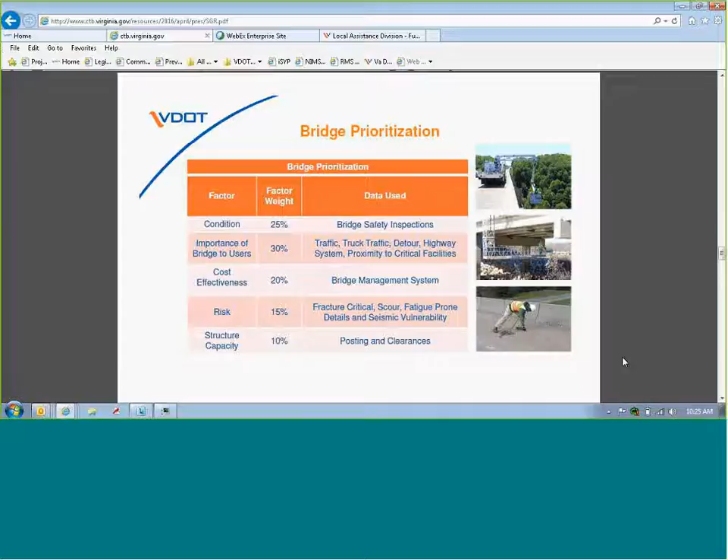That's really the basis of my thing. Let me then just go through very quickly the prioritization process for pavements. What we tried to do with the process on pavements, to keep it simple, is look from the perspective of the localities, moving the process forward because of the primary extensions process already in place. We moved forward using that same process, and the Commonwealth Transportation Board approved that process in July to be used in the future. So we were able to get projects started very quickly with the repair of primary extensions.

And when you're looking at pavement prioritization, we're looking at contiguous sections of pavement and not tenths of a mile segments. Because, as I hear from engineers, because I'm not an engineer and I will not play one, that's really pothole patching. So you're looking at true project type work. A section of our maintenance division has put together a list for some time that shows what work they completed on primary extensions to get the critical condition index of those projects up.

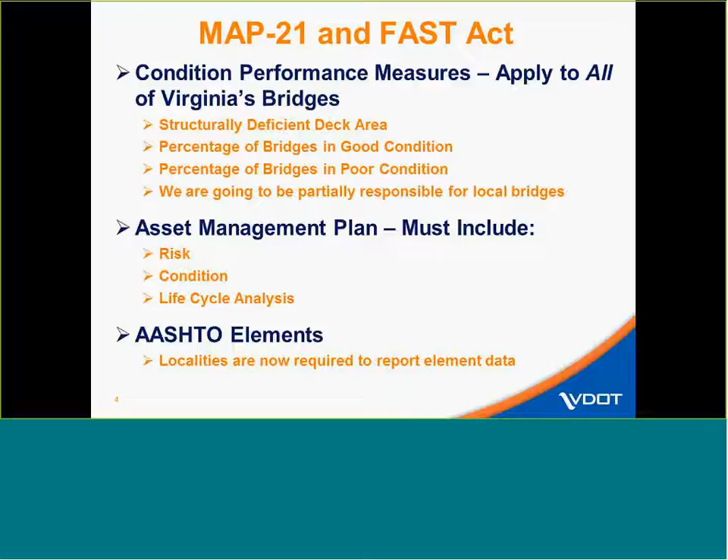Just a little description of some of the things going on in MAP-21 and the FAST Act. As I mentioned before, these apply to all Virginia bridges. In the future, the Federal Highway Administration is going to be measuring the deck area for bridges in good and in poor condition. And as I mentioned, we'll all be together as a state, responsible for local and state-owned bridges. Again, as Jennifer mentioned, they're requiring an asset management plan, and that has to include elements of risk, condition, and life cycle analysis.

What is the state of good repair? You've heard that term a lot. As it applies to bridges, as Jennifer mentioned, it is for deficient bridges and pavements, but what it is not is a maintenance program. I've heard the commissioner say this several times, because they were involved really heavily with the development of the law: this is not about getting a paint job on your bridge. This is significant work that must pass the test for taking a bridge off the structurally deficient list.

But at the same time, don't conflate this with a bridge replacement program. Many of the bridges that will be funded through the state of good repair will wind up being replacements. So don't come away from this thinking, oh, at this meeting they said we can't replace a bridge. No, that's not true. What we're trying to do is the most appropriate set of actions for every bridge. It's really critical, and we'll talk about that a little more as we go through it. And then, in accordance with the CTB resolution, the bridges are selected by the prioritization formula.

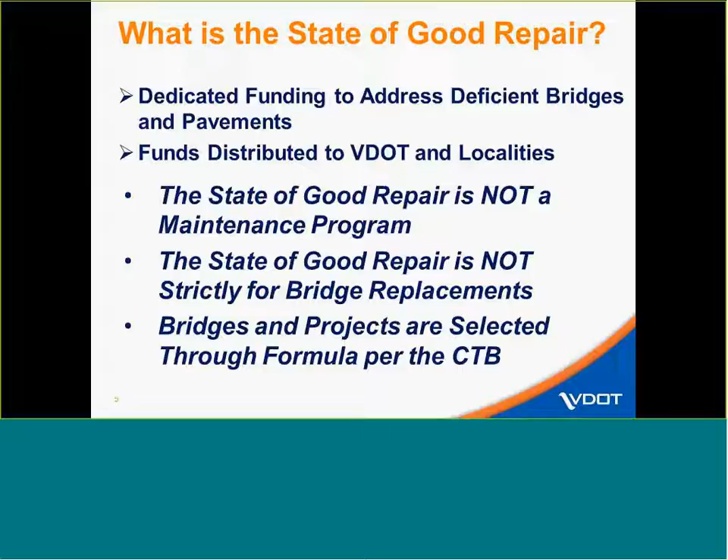What is the prioritization formula that we're using? We have the general prioritization formula, and we tried to make it really address the things that we would want to address as good stewards of these assets. When you have an inventory of bridges, you have decisions to make. The first one is, what bridge do I work on? You've got maybe a few as a locality, or thousands if you're a VDOT district. Of all those bridges, which ones do I work on?

And then the other question is, well, okay, now once I decide to work on that bridge, what do I do? I kind of get all of those pieces into a general formula, and this is showing the bones of it. It's based on these 5 variables. One for importance, one for condition, one for risk, what we were calling design redundancy, one for structure capacity, and that's vertical and horizontal clearances, and is the bridge posted? And finally, the last one is the cost effectiveness factor, which measures effectiveness of the proposed actions on that bridge.

So we put all those together into this general prioritization formula, and that's really the basis of the scoring. So just to give you a high-level introduction to what we're doing, and I'll talk a little more about each variable. I'm going to try not to kill people with technical details, but those first 4 variables are based on objective, nationally recognized measurements for condition and inventory. That's where you have some decisions to make. Each of the variables is based on a 0 to 1 scale and has really no dimensions or importance other than as a relative measurement. So it's kind of a scale of the bridges.

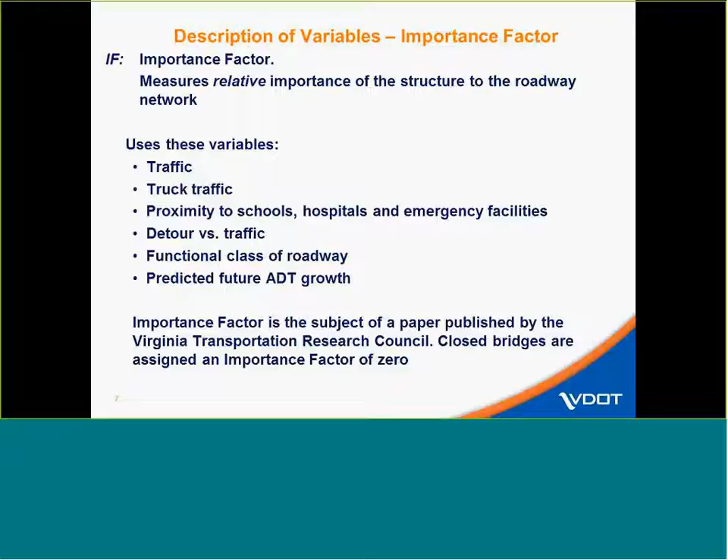The first is the importance factor, and this was the subject of a paper by the Virginia Transportation Research Council. It ranks all of the bridges in the state with the idea of saying, how important relatively is this highway that the bridge occupies to the greater highway network? In that formula, we use things like traffic, proximity to schools, hospitals, emergency facilities. We also measure detour versus traffic. So if a bridge has a very long detour but doesn't affect a lot of people, that's one thing. But if it affects a lot of people and has a large detour, that increases the score. And we look at the class of the roadway, and also how much traffic on that bridge is predicted to grow.

And you'll recall, this is in the law. This is a requirement, that we measure and consider condition. So that's the condition factor. For condition we take something called the health index, based on the element data I mentioned earlier. Many of you may be familiar with the general condition rating, a high-level description of a bridge and the big pieces on a bridge. But the elements are much more detailed. Think about a car: at a very high level, the engine, like the general condition rating descriptions, but for these elements we'd get down into the brakes, the tires, and all the little pieces of the bridge. We take that element condition state data and put it into a formula to measure an overall health index for a bridge, which gives us a sense of how much deterioration that bridge has experienced.

And this is new for many localities, so some of you have not had the opportunity to get data. Where we lack data, we have a correlation curve based on a weighted average of the general condition ratings that we're using for now and for this round, so that people don't go out and have an inspection that they don't necessarily need. So just so you know where that's going.

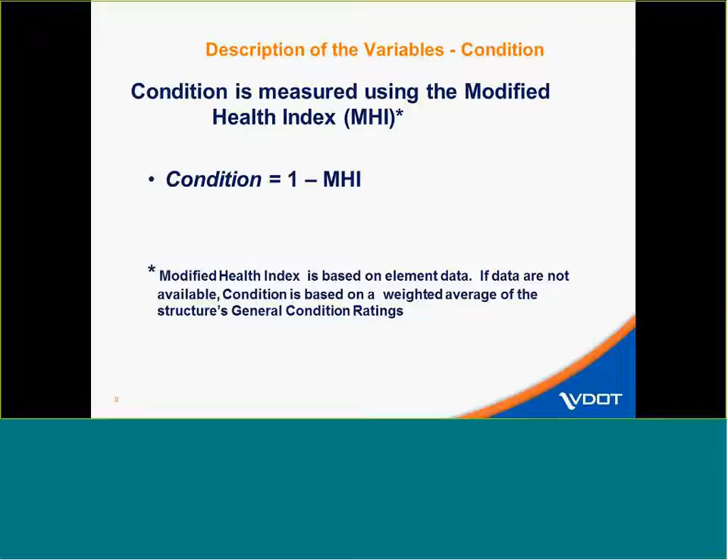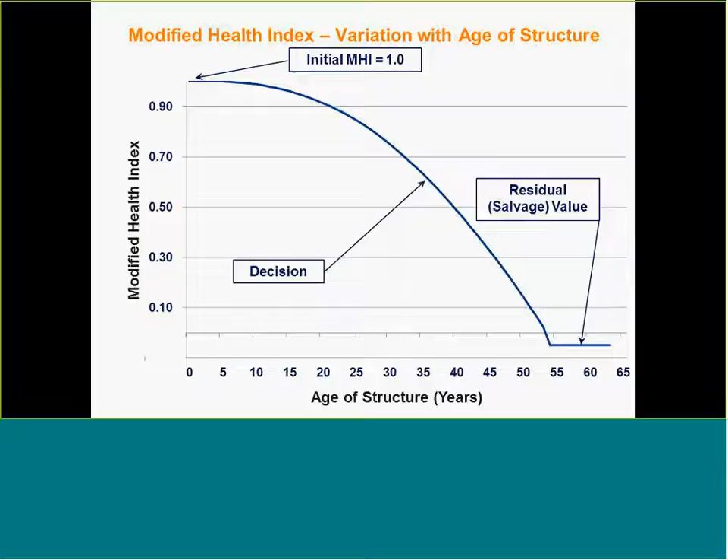Okay. This is again a high-level sense of what health index does. It gives you a sense of the deterioration of the bridge. It also allows you to understand the current valuation of the equity of a structure. Because a structure is a funny thing: it has value, and we're trying to make monetary decisions about it, but nobody wants to buy it, right? It doesn't really have any revenue associated with it. So this is a proxy for measuring current valuation of our structures. In this example, if you had a $1 million replacement for a bridge with a health index of 0.32, we could say that bridge is worth $320,000 of current value, or alternatively, that it's lost $680,000 of value due to deterioration. And the same thing graphically, as the bridge deteriorates over time.

Also, the redundancy factor, you can really understand this better by calling it risk, but that's kind of a loaded term, so we went with design redundancy, and it really has to do with when the bridge was designed and built, does it have enough redundancy in it to problems, right? So what we've done is we consider the factors of scour and fracture critical, and scour is the susceptibility of a bridge to wash out, which is a big problem for bridges, and when they do tend to fail, that's usually how they do fail.

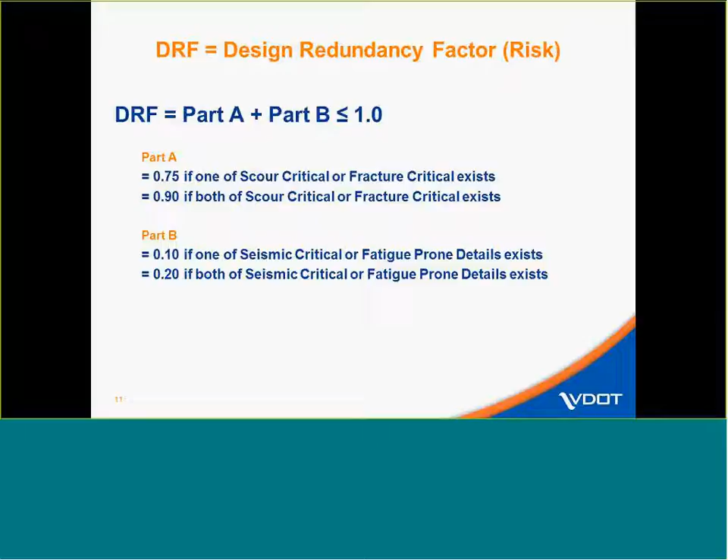The other one, fracture critical, and what that means is do we have a lot of additional beams? If it's just two beam girders that are supporting the bridge, then you don't have a lot of redundancy or alternate load paths. We try to measure that. And the other thing is called fatigue, for a bridge that has fatigue problems, and that's the susceptibility to repeated loads. We measure that. And also, is it susceptible to seismic activity? So we put it into the design redundancy factor.

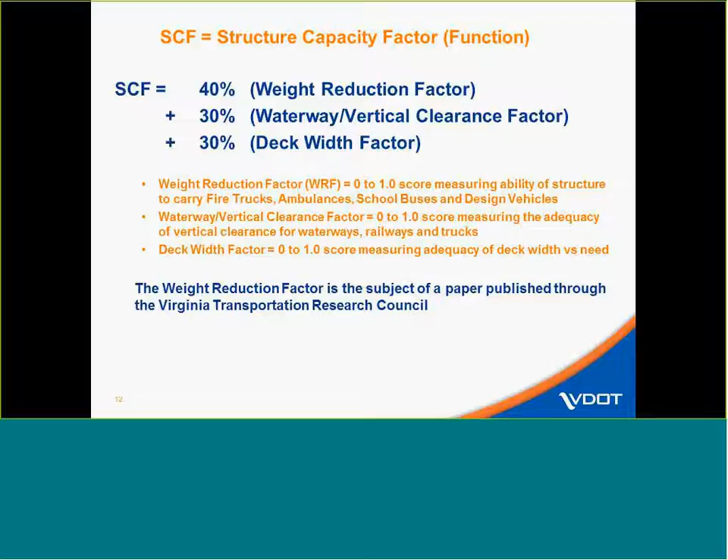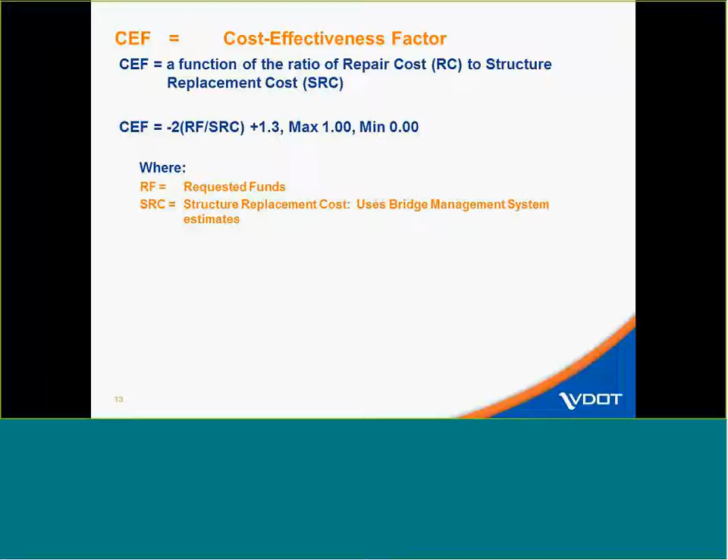Now, this is the last of the 5 variables. I'll probably be spending most of the rest of the time talking about this, because this is the most important for you, because this is the one that you can affect. The other 4 are really based on the data. The basis of this is really a ratio of the requested funds to the replacement cost, and there's the formula for it there. The RF is the requested funds, and the SRC is the structure replacement cost. Maximum is 1, minimum is 0. And the idea there is if we can do a more cost-effective repair, then we want to do more repairs, more work, rather than less.

Okay, pardon me. I apologize, I'm going to buzz ahead.

Now, the important thing is it's based on the requested funds. So I have an example. Say you had a bridge project that had a $10 million replacement cost, and you felt like the project cost needed to be $3 million. You had $1.5 million in funds from some other source, and you're requesting $1.5 million in funds from State of Good Repair. Then the ratio would be based on the amount you requested, not the project cost. So that's a really important part of this. In this case, you would be asking for $1.5 million, we divide it by the $10 million replacement value, and you get a full score for this value. And that's really important as you start looking at which bridges get selected.

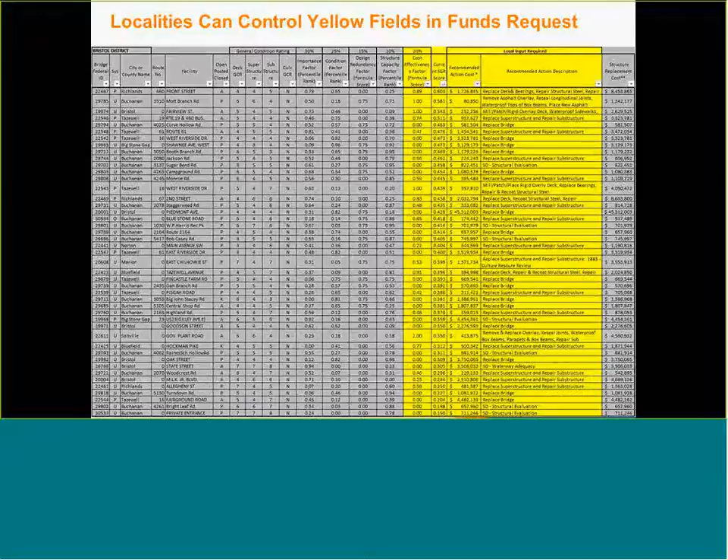The ones that you can control that do affect your score are these, the yellow ones, and this is the cost effectiveness factor based on the scope and estimate. Even though it's only 20%, it can have a significant effect on the rankings. So I want everybody to focus on that and understand it. And I'm going back through this.

At the due date, you'll submit a form that says this is how much money we're requesting, and this is our associated scope. And you'll get today, or whenever you get it, the suggested scope from the bridge management system. Now, the bridge system takes high-level, visually based information and makes recommendations based on that. You go into your individual bridge, and you'll know it a little better than the management system.

You may take chlorides, you may take strength tests, go in there and say, well, that's nice that the bridge management system says this, but we have a different view of what this bridge requires. Maybe it's less and maybe it's more. And that will inform your decision on what to ask for, how much, and help you develop your estimate.

The only thing is, if you're going to go over the estimate listed in the management system, then you need to get agreement from the VDOT district bridge engineer. You're going to change the scope. And it's basically a conversation where you say, hey, this is what we found, and this is why we want to go above. And that's an important thing.

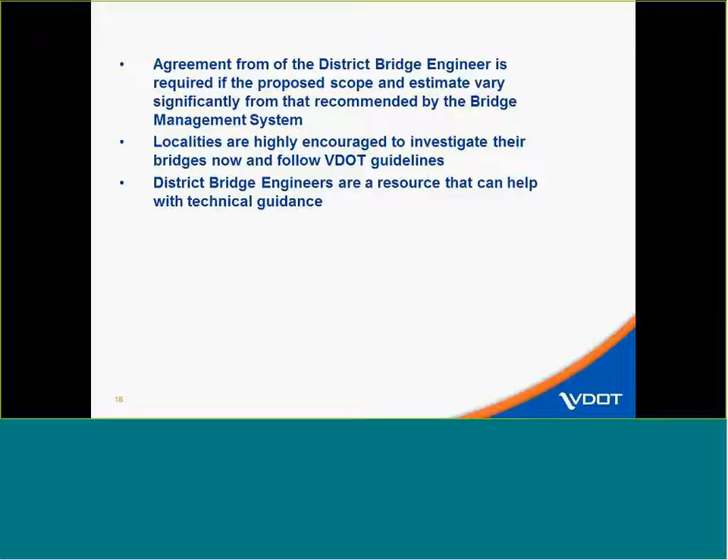We encourage you to investigate your bridges now. Go on out there, and we have a lot of guidelines on how to do that, and that guidance is all online. If anybody has any trouble finding it, you can contact district bridge engineers or us in central office, in the bridge division, and Todd Hallisey will share our contact information with you later on, or I'm available. So those are some important things to know as well.

Now, for anybody out there who came into this thinking, well, this is a bridge replacement program, I would at least introduce you to the concept of what we're talking about and why it isn't always going to be a replacement type discussion. And this is not just localities. This is Virginia, and the entire nation is starting to think in this new way.

Now, a quick study doing a 35-year look ahead: we have this aging inventory. What if we replaced every bridge as it turns age 70, or the bridges that are currently structurally deficient, replaced, not repaired and preserved? Now, you may have heard many people talk about a 50-year service life for bridges. In truth, when they were designing these 50 years ago, they didn't really know when it was going to need replaced. The 50 is probably a good standard, but we found that we can press them into service for another 20 years or so. But if we wait too long, then they do need to be replaced.

But this is the amount of money needed to replace them versus the amount of money that is available if we hit the high watermark for our funding every year for the next 35 years. These are billions of dollars of statewide need. So you can see that the money is not there for replacement. We can't put our head in the sand about it. We're aware of the problem now, looking forward, so we have to do the best thing now. We've got to start right away, and we're starting with the State of Good Repair Program.

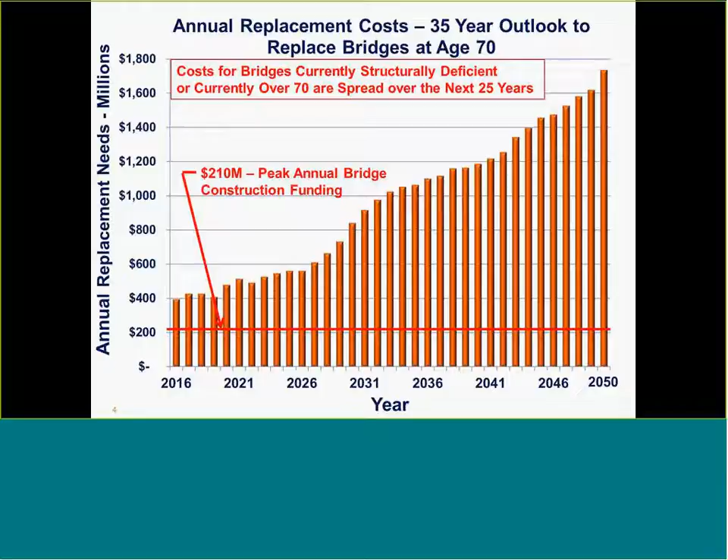No, it's saying in 2050 there are so many bridges becoming old that we're going to have to spend $1.6 billion to replace them all in that year. So our approach here in VDOT is we're shifting our culture. And it is hard to shift culture because we tend to think as engineers of designing and building a new thing. And honestly, I think politicians and many people just think that way. It's old, let's replace it, but we can't do that anymore, as the previous slide showed.

We've introduced this concept of targeted repairs in conjunction with system preservation. So, in more layman's terms, we go out and we fix what's wrong and recognize how it got wrong in the first place and try to prevent that from happening again. It's kind of basic logic.

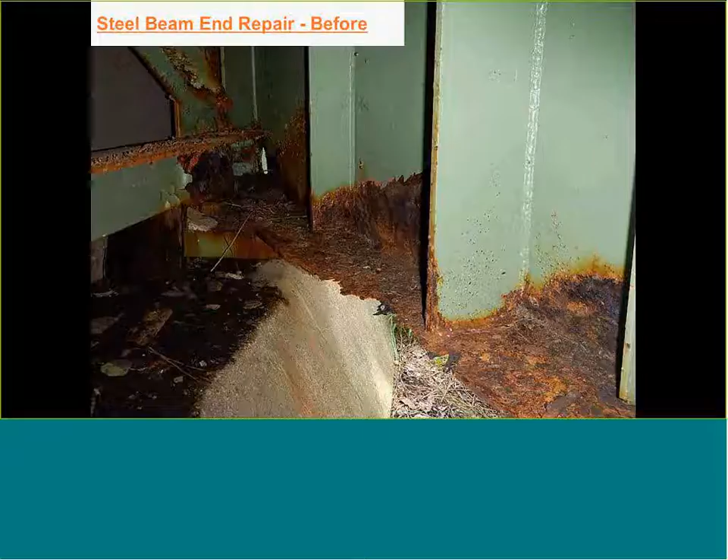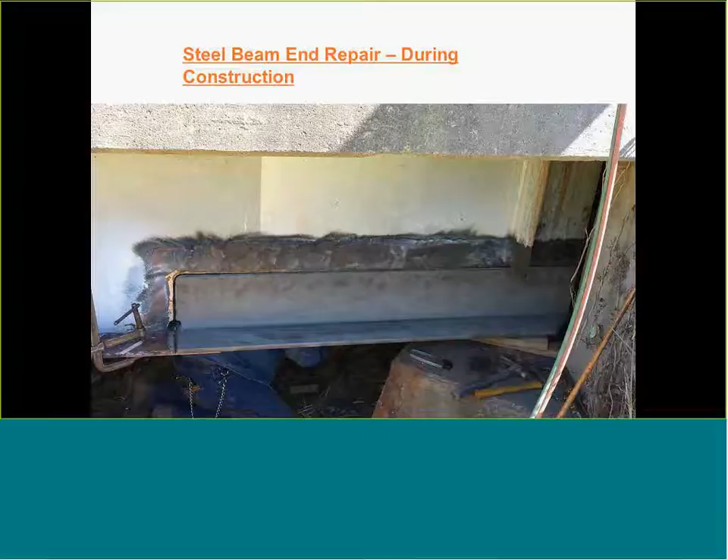The typical rotted beam in a bridge, you see, that doesn't feel good to look at. That's a corroded beam end of a structurally deficient bridge. Now, the old way, we would have talked ourselves probably into replacing that entire bridge because of this. But now, what we can say is let's just cut out the bad part, replace that portion of it, and we have something that's very functional now. Is it a new girder? Obviously, it's not. Will it give us decades more of life? Yes, it absolutely will. So this is the general approach that we're taking to fixing. Then you coat the beam and you protect it.

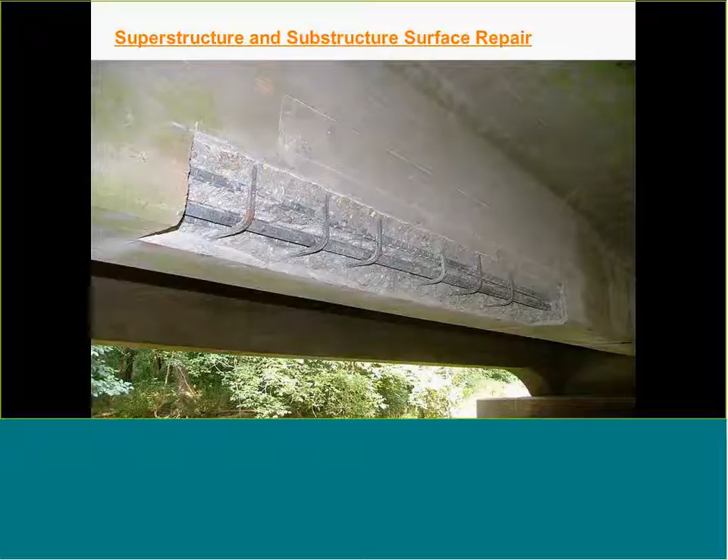We can do it for concrete too, and this is a portion of a concrete beam that was corroded and falling. We chop out, we pour back, and we repair the problem. And then you can do it for columns and pier caps. So all the corroded concrete that you see when you go into bridges, that can be fixed.

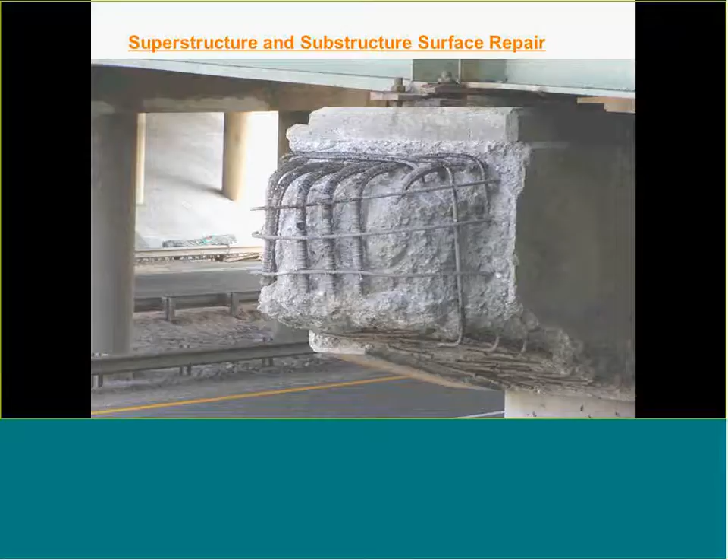Now, as I mentioned, it's not enough to just go in and fix the problem. We want to preserve. We don't want to have the same thing happen to us in another 20 years. The good news is we've developed good techniques for doing that, and we know what's causing the problem. And a lot of industries don't have that advantage, in the sense that we know exactly what's causing our problems. It's generally corrosion caused by water, and what's being carried in that water from de-icing chemicals, that sort of thing.

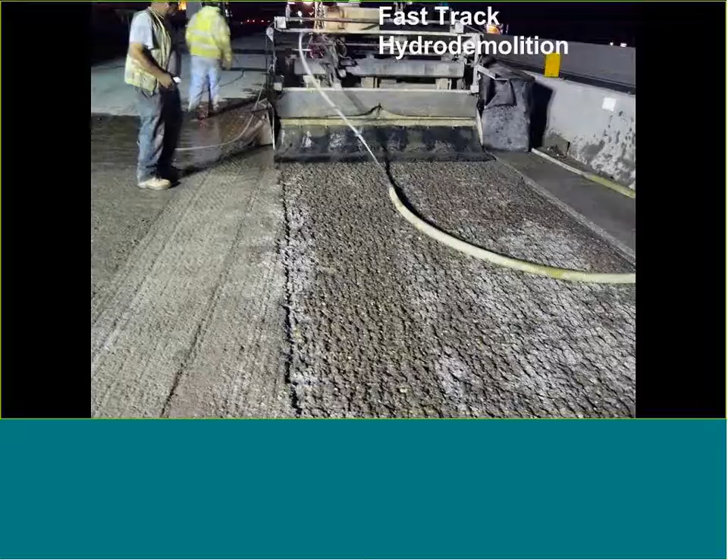One of the things we're doing, and we like to use the analogy of a roof. A bridge is kind of a house with a roof, represented by the deck. But we had this fatal flaw in our roofs that were built many years ago, which all had holes in them, and that's at the ends of the deck in the expansion joints. So we've got to get the roof fixed. So one of the things we're doing is a lot of overlays.

You go to a bridge and you take the chloride-contaminated part of the concrete out, the bad part, and we use something called fast-track hydrodemolition for a lot of that. That does two really nice things. That machine shown there is a fast-track hydrodemolition. It applies very high-pressure water to the surface of the bridge deck and takes that concrete out. And you can see a very rough surface for the concrete overlay to bond to, and that's a really good thing. Another picture of that on a bridge that we did here near Richmond.

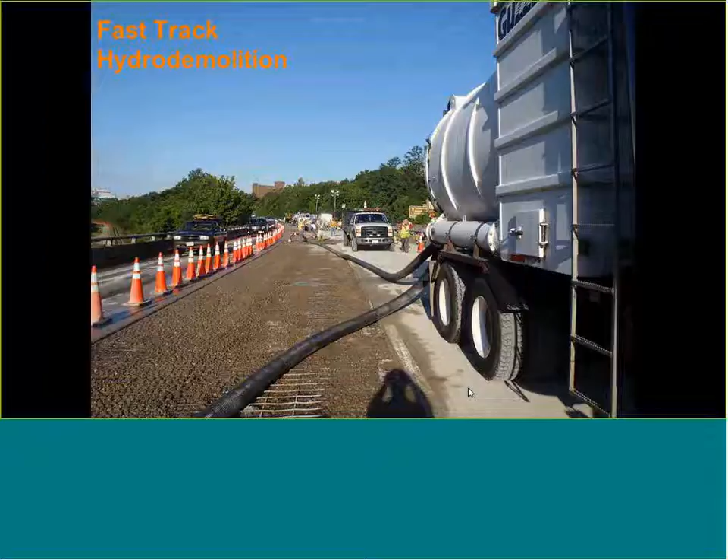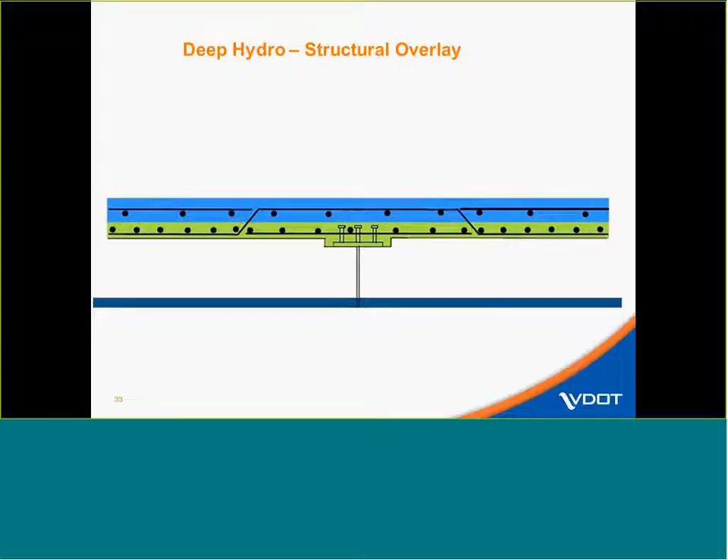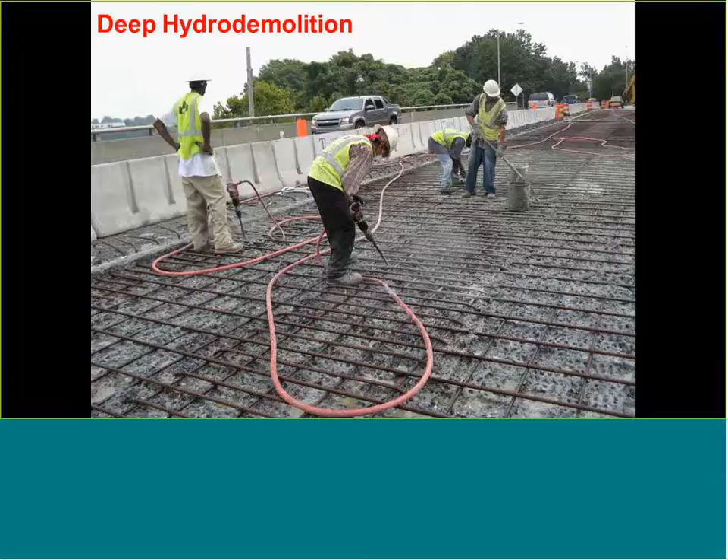They basically come out and prepare the deck for a new concrete surface. This picture shows that you can go very shallow with it, or you can go deeper depending on the degree of deterioration and contamination. And here's a picture of a deep hydrodemolition. You can see it goes deeper into the deck and takes more of the old concrete out, and hand chipping is involved with that. In the end, we put a new overlay on it, and it is essentially, for the motorist, a new deck.

And what's nice is the new overlay, the new concrete surface, is impermeable. The old problem with our older concrete is that it's really spongy. So when the water gets on it carrying the salt, the water goes into the concrete with the salt, and that salt causes corrosion. It's a real problem. But our new concrete sheds the water much better and really prohibits that effect.

And also the bridge deck expansion joints. When you're driving over a bridge, the clunk clunk, that sound, those are at the ends of the deck, and they're built in there to allow the bridge to expand and contract with the weather.

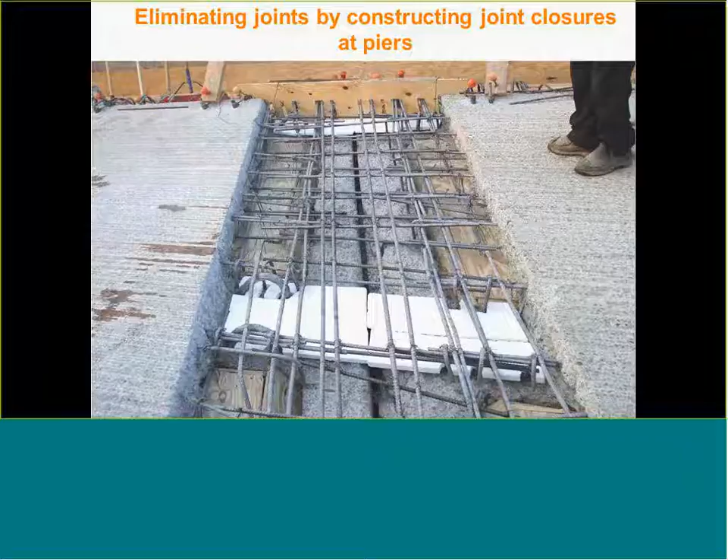But we found that we can eliminate many of those joints as long as we do a little analysis on the structure. What this is showing is there had been an expansion joint right there in the middle of this picture. And what we did is we chipped back on both sides of that joint, and we're going to cast concrete over the top of it. And that's what it looks like.

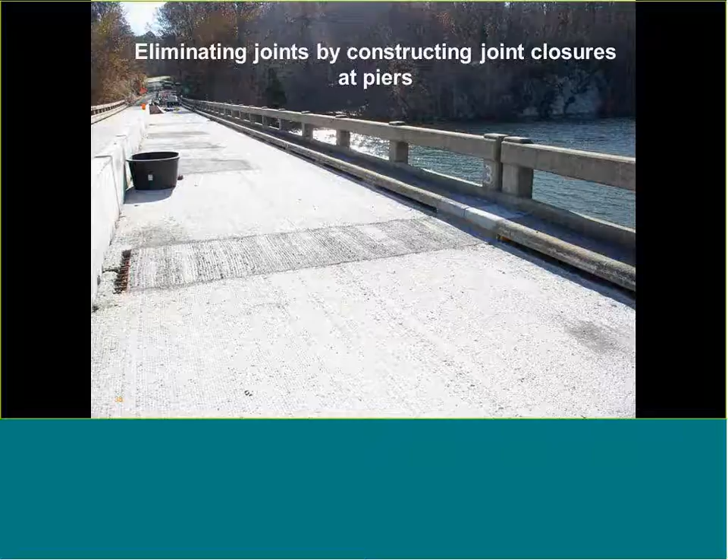So we had a joint at one time, that joint is gone, and then this bridge deck would then get an overlay so we have a smooth driving surface. Again, the idea is sealing up that roof, fixing the problem that allows the water and salt in. So quick examples, and I'll really just give a quick one here.

This is I-64 over the Shockoe Valley, just east of Richmond, near Central Office. And this is an at-grade and an aerial view of the bridge deck prior to the repairs. And it was a problem because you can see all the patchwork kind of look, all that patching that we had done out there, and the deck was deteriorating.

And we were thinking ourselves into a spiral on the thing. We kept saying, well, yes, it needs to be repaired, but you see, it's not really wide enough, is it? And gosh, it's part of this big interchange, and maybe for the interchange, we kept waiting, and the bridge got structurally deficient, and we kept saying, well, we can't do anything about it, but really we could. There was a lot we could do about it.

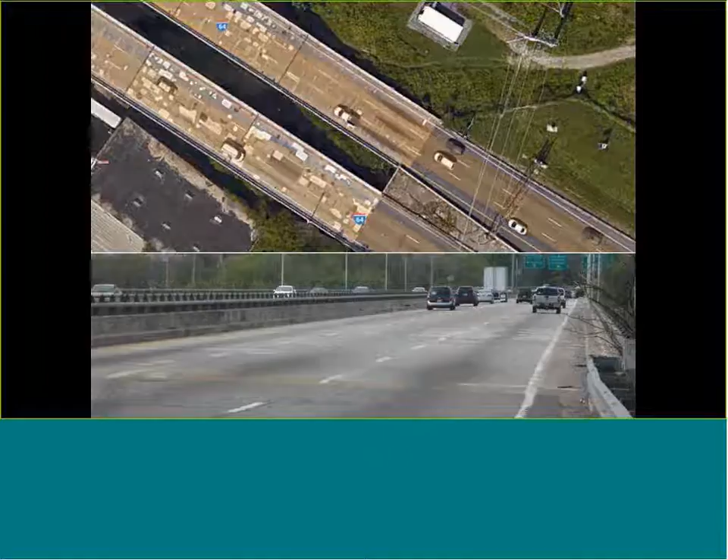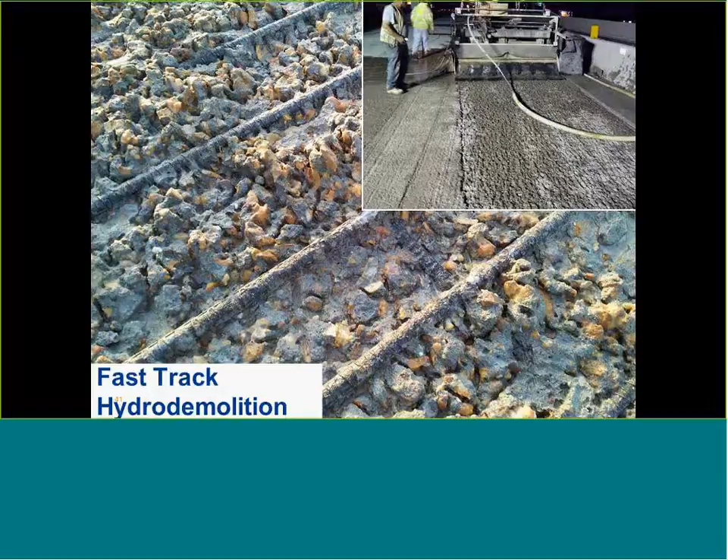So what we did is we took a fresh look at this target repair idea. We did a fast-track hydrodemolition on the bridge, and we came in and we gave a new surface, and that's a picture of the deck prior to placement of the overlay. What it looks like now. We coat parapets to preserve them, to keep the water from coming in. We were not to eliminate the joints yet. That'll be done on a subsequent project.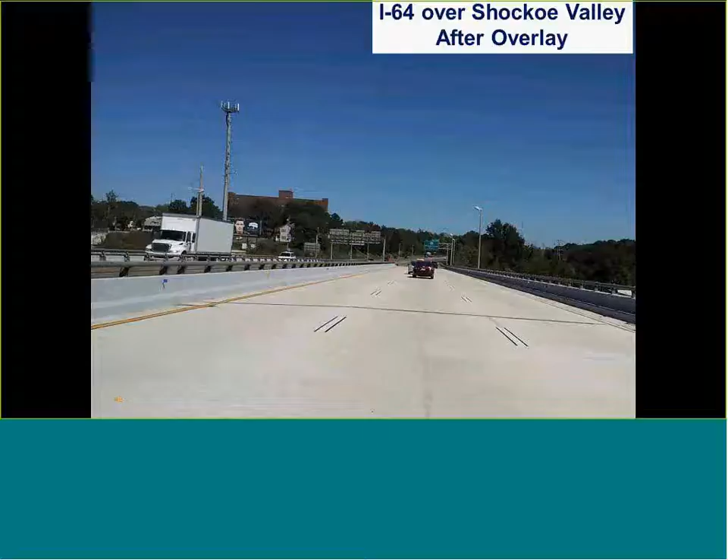So here's a summary of how the two ideas compare. So with our repair preservation plan, which is basically doing everything we know to do to fix and preserve that bridge, we're talking $22 million. For replacement of those bridges, it's actually twin bridges, would have been $125 million or better.

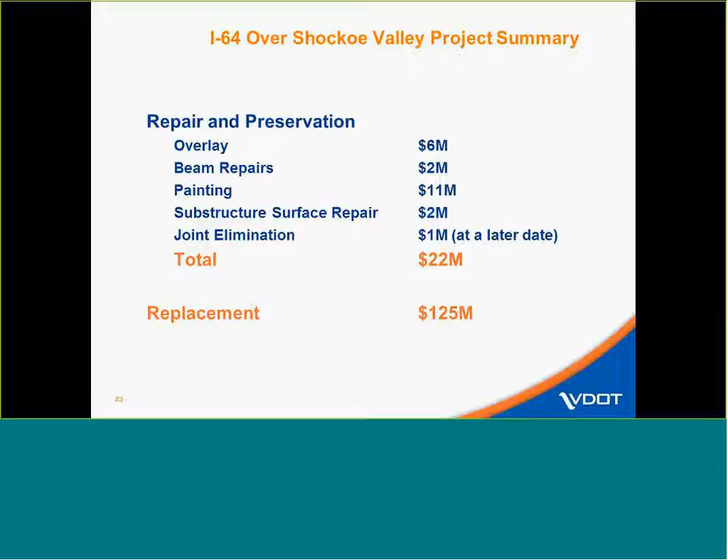So this gives you a sense of the risks that we can be addressing. And this is the way we need to think as we go forward and we try to address all the structurally deficient bridges in Virginia. If we have this philosophy, we can hit a lot more bridges and do the right thing. Now, again, sometimes bridges have reached that deterioration point where they have to be replaced. Many will. But we just think about this and try to apply it where possible.

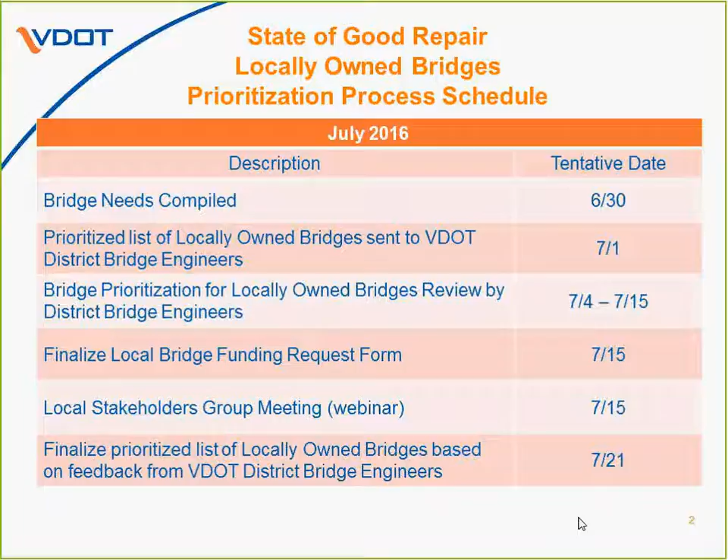So we received some feedback initially from them, and then we had an in-person meeting back on August 1st. We've been getting some comments from that group and refining our spreadsheets and some of our data accordingly based on what we received back. So we reached out to our district folks, the VDOT district staff, back on the 11th. We had a video conference just to get them up to speed on where we are with the program and the schedule moving forward, so that if you all have questions, you can reach out to those folks too.

I've been revising the prioritization list that we sent out this morning. It is out on our website, and I'll show that here in a second. Of course, the outreach to localities, the webinar, which is today. Julie mentioned our local programs workshop. We're going to have 2 presentations given by Adam and a couple different breakout sessions, and like Julie mentioned, we're going to have an information table for you guys to ask some more detailed questions to some of the bridge folks. There's a lot of time, if you look at the schedule between now and the end of September and October, for training, for outreach, for you to ask questions and work with us.

Even through October, we want some feedback. We want to hear from you. We want you to reach out to your VDOT bridge engineers to ask questions and to go through the information, review the information we have to make sure it's correct. If you see things on the list that you're not sure about, please reach out to those bridge engineers. The form that you went over is going to be due on November 1st,

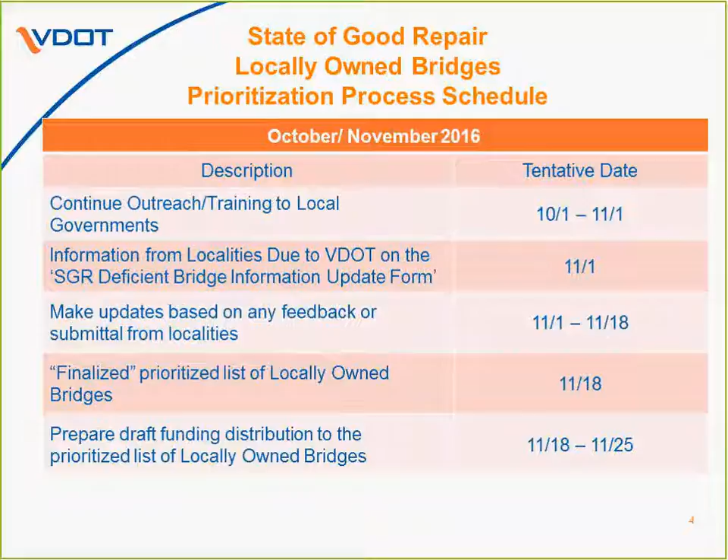with supporting information that you have, and the bridge office is going to evaluate what you submit and the cost effectiveness of what you're submitting, and finalize the prioritization list, and we're going to prepare that to bring to the CTB, the Commonwealth Transportation Board, in December. We don't have a date yet for that meeting, but we'll be sure to keep you updated. So the CTB will receive this tentative draft list in December, and they'll approve the projects in January.

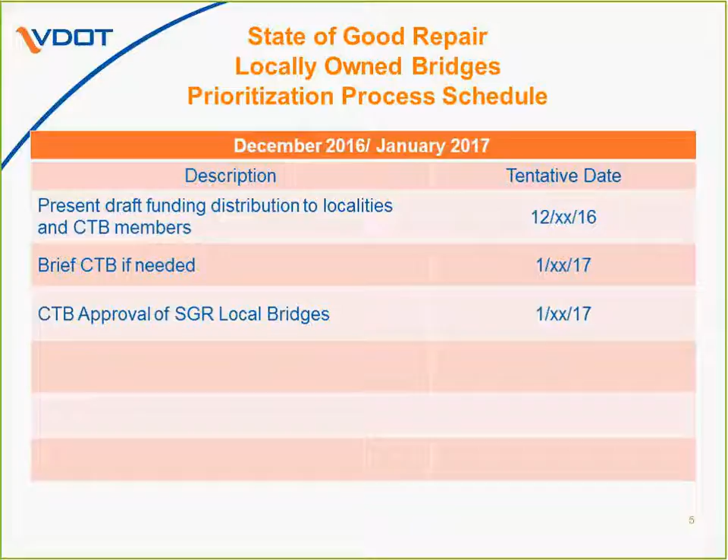And I know I went through the schedule quickly. We're going to post this PowerPoint on our website also for you to be able to see. If there's any questions. The December CTB meeting date, I just looked on their CTB webpage, has been set. The workshop will be December 6th, the action meeting will be December 7th, and so this will be a workshop item at the December 6th meeting. That will be here in the central office.

I see a couple questions. The question is, will contracts for repairs or replacement need federal requirements and provisions included? For that question, this is Jennifer Olin again with Asset Management, and for 2017 and 2018, we exempted the projects that were coming through with state funding, so projects from 19 forward would be expected to start following the federal requirements. For pavements, it's pretty simple because you're doing that somewhat on an annual basis. On the bridges, it's very different.